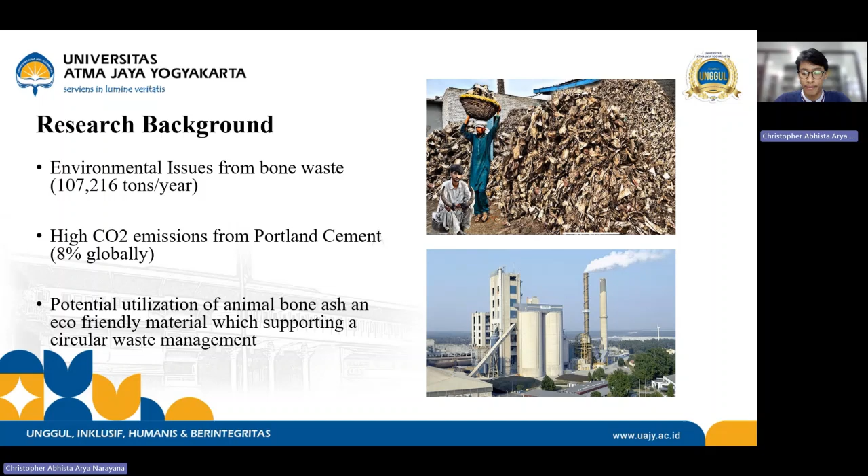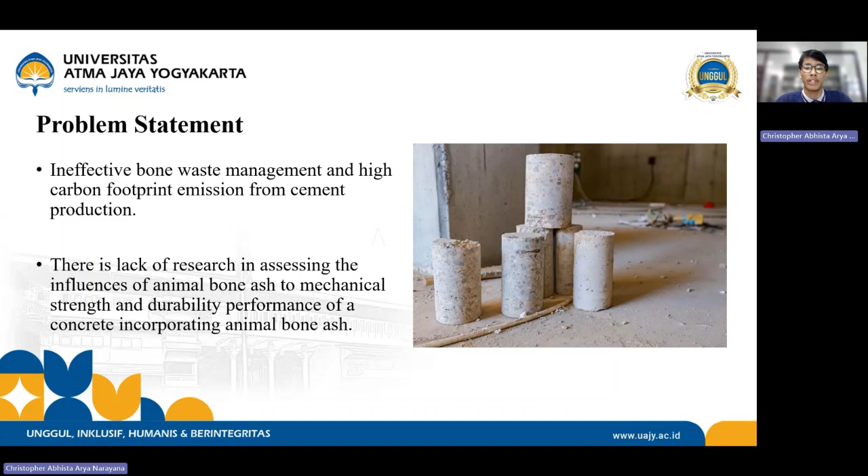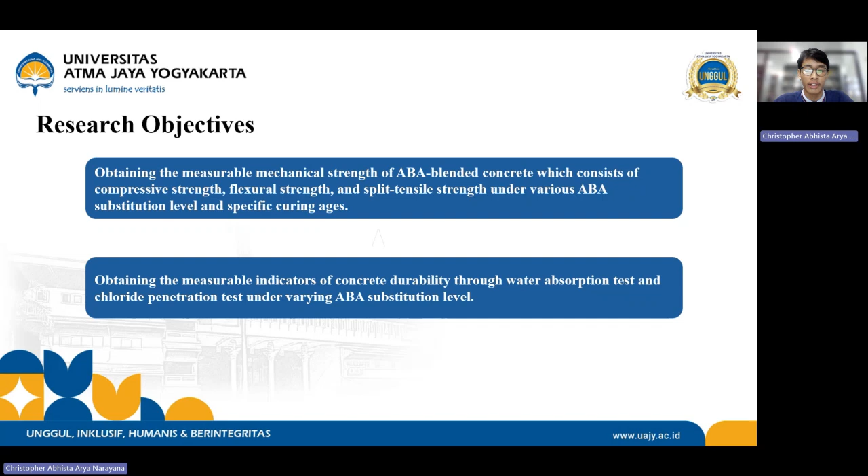Then the research objective: the first is to obtain the measurable mechanical strength of animal bone blended concrete, consisting of compressive strength, flexural, and split tensile strengths under various substitution levels. And the second is to obtain measurable indicators of concrete durability through the water absorption test and chloride ion penetration test under various substitution levels.

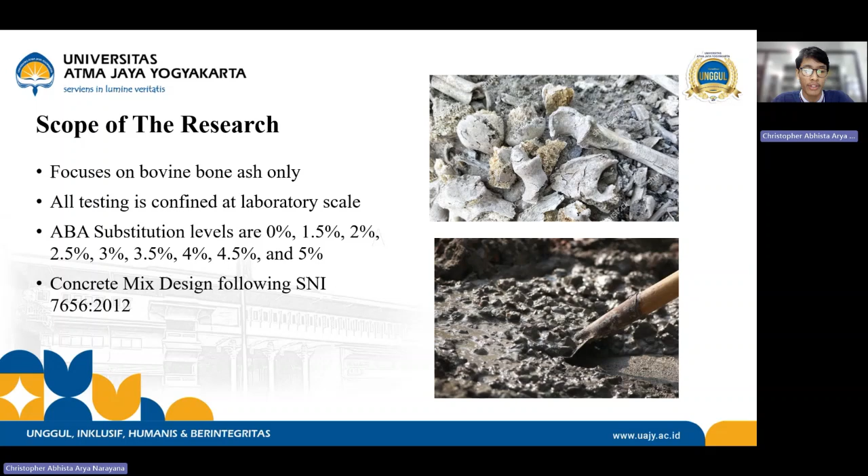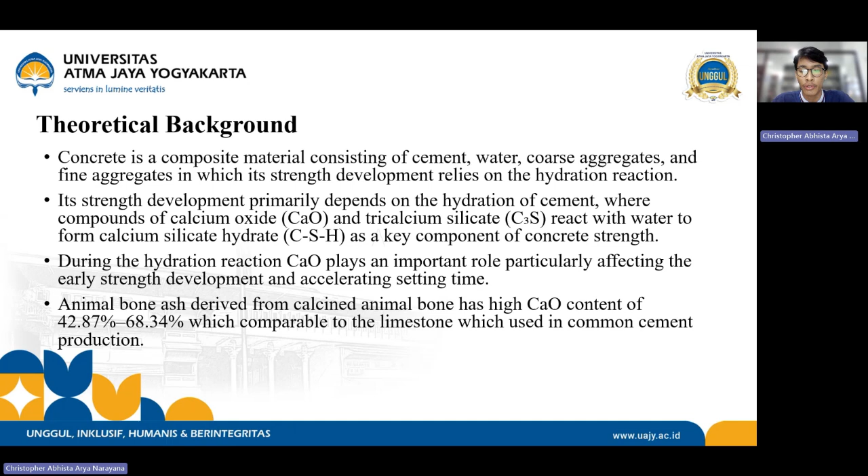During the hydration reactions, calcium oxide plays an important role, particularly affecting the early strength development as well as accelerating the setting time. Animal bone ash, which is derived from calcined animal bone, has a high calcium oxide content of 42.87% to 68.34%, which is comparable to the limestone used in common cement production.

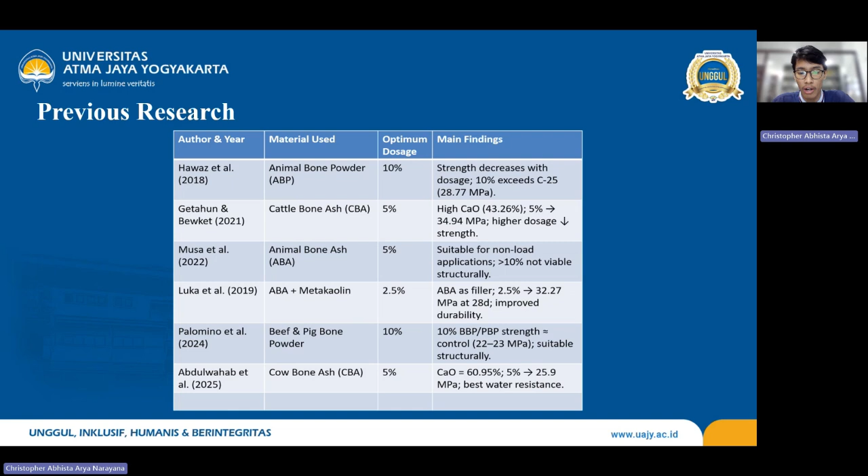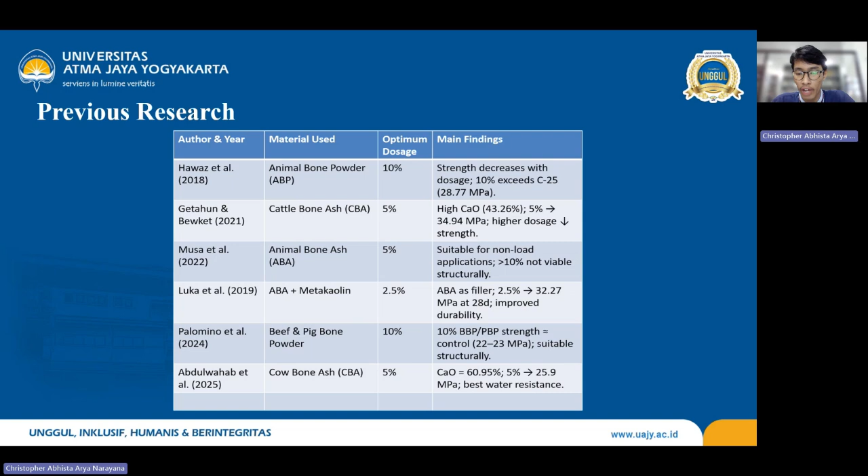The next is Palomino et al. in 2024, who use the combination of beef and pig bone powder with an optimum substitution level of 10%. As a finding, with 10% substitution, it can reach the control strength, which is suitable structurally. The fifth is by Abdulwahab et al. in 2025, who use cow bone ash at 5% substitution level. They find that the bone ash has comparable CaO content to limestone, and 5% substitution can achieve 25.9 MPa as the highest compressive strength, and it has the best water resistance.

And for the methodology, ordinary Portland cement type 1 is used as the primary binder. The tap water which will be used for mixing and curing must be clean and not contain any organic contaminants and sludge.

The coarse and fine aggregates are procured from local suppliers and will be cleaned first prior to use. The mix designs will follow SNI 7656 of 2012 with a desired compressive strength of 30 MPa after 28 days of curing and a consistent water-cement ratio.

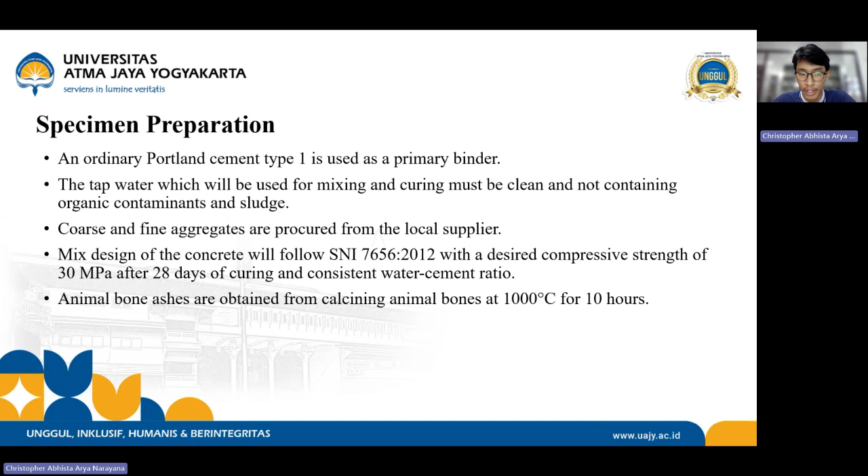Animal bone ash is obtained from calcining animal bone, particularly bovine, at 1000 degrees for 10 hours. The animal bone ash must undergo XRF investigation prior to use to ensure it has CaO content comparable to limestone. The ash will be substituted at varying dosages of 0, 1.5, 2, 2.5, 3, 3.5, 4, 4.5, and 5%.

Prior to casting, the concrete will be tested using the slump test to ensure better workability. For the specimens, 150 by 300 cylinders are used for both compressive and split tensile strength tests. The beam, 100 by 100 by 500, is used for the flexural strength test. The cube, 150 by 150, is used for water absorption and chloride penetration tests.

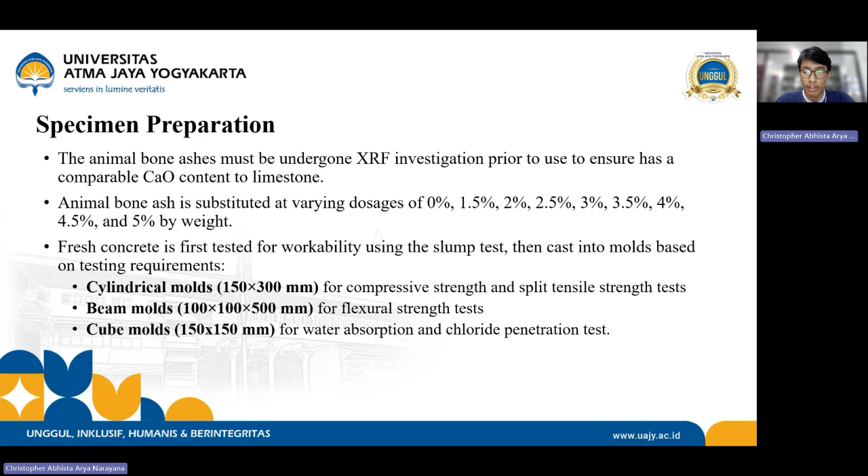For the slump test, I refer to SNI 1972 of 2008. It will be used to measure the workability and consistency of the fresh concrete, and helps to observe the water demand change due to animal bone ash substitution. For the compressive strength, I refer to SNI 1974 of 2011. It evaluates the resistance of the concrete to axial loading and is conducted after 7, 14, 28, and 56 days

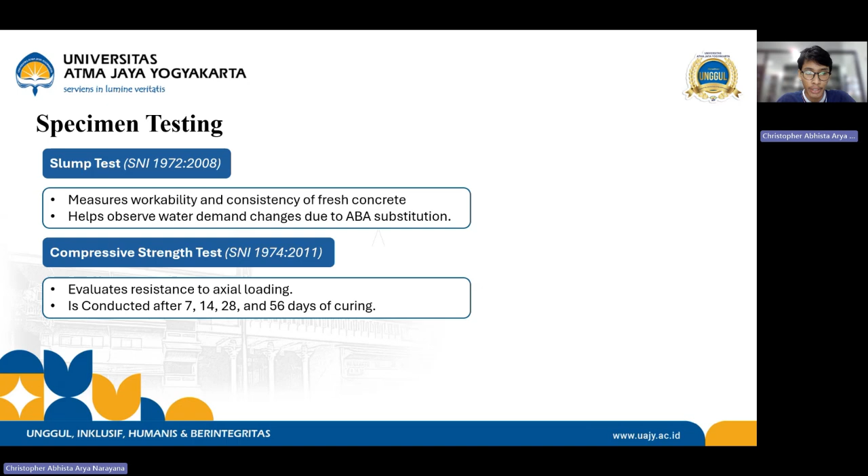of curing. For the split tensile strength test, I refer to SNI 2491 of 2014. It assesses the concrete tensile resistance through indirect loading, using a cylindrical specimen loaded diametrically, at 7, 14, 28, and 56 days after curing. The flexural strength test refers to ASTM C78. It measures the modulus of rupture using a beam specimen under third-point loading, and indicates the resistance to bending as well as cracking.

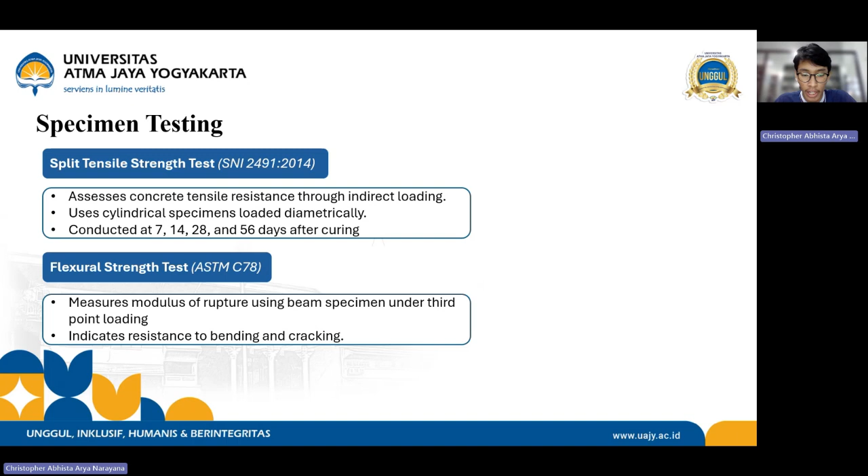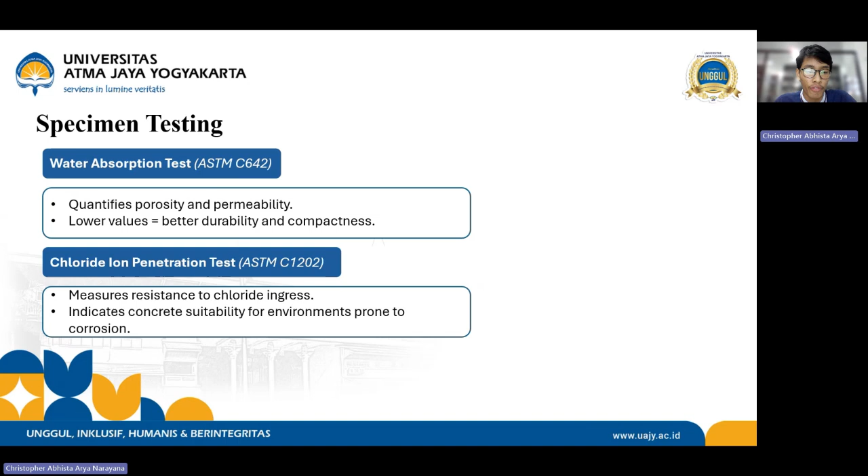For the water absorption test, we refer to ASTM C642, which quantifies porosity and permeability, with lower values indicating better durability and compactness. For the concrete chloride ion penetration test, I refer to ASTM C1202, which measures the concrete's resistance to chloride ingress and indicates its suitability for environments prone to corrosion, especially marine environments.

The data analysis techniques involve, first, descriptive statistical analysis, which calculates the mean, standard deviation, and coefficient of variation of the test results to assess data consistency and reliability across specimens and ages. Comparative analysis is used to compare each animal bone ash mix to the control mix with 0% animal bone ash. A PI higher than 100 indicates improved performance, a PI equal to 100 indicates equal performance to the control mix, and a PI less than 100 indicates reduced performance.

Trend and regression analysis is used to model the relationship between ABA content and compressive strength, tensile strength, flexural strength, water absorption, and chloride penetration. Then the optimum ABA substitution level is determined based on a minimum 30 MPa compressive strength, improved or acceptable workability, and durability. It indicates whether the mix is suitable for structural or non-structural applications.